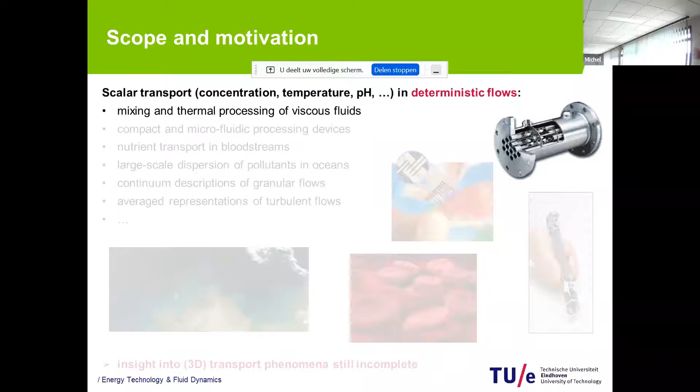And okay, what is now the scope and the motivation in general of our work? Well, that is scalar transport, and that can be anything from concentration to pH values, for example, in deterministic flows. And that actually happens in quite a lot of different flow systems. So there can be in industry, for example, mixing and thermal processing of viscous fluids, small systems outside of industry, so for example, nutrient transporters. And the list is actually much longer than that. Turbulent flows, they also can fit within this category.

We know quite a lot about transport phenomena. All the insights are still, of course, incomplete. And that is our general motivation, to deepen the insights in these types of systems.

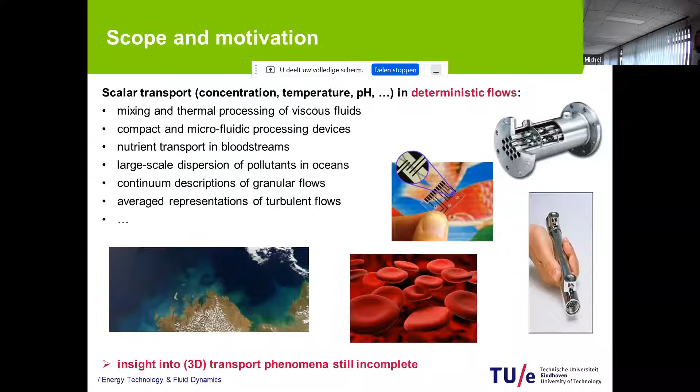Okay, a brief outline of my presentation. I will first of all discuss a number of basic concepts with respect to Lagrangian transport to make it accessible for you, because I presume that not everybody of you is an expert in this type of material. So I will introduce first of all some basic concepts, and then I will actually discuss 2 topics. So it's a very broad title, but there's only limited time. So I will actually zoom in on 2 topics that we have been working on.

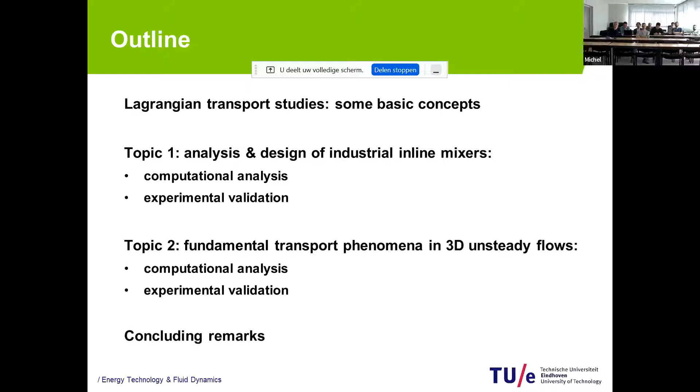The first topic is the analysis and design of industrial inline mixers. And the second topic is of a more fundamental nature, where we use those same concepts to study 3-dimensional transport phenomena in unsteady flows. And in both cases, it will consist of a computational analysis and connected with that experimental validation to ensure that all we study is also relevant in practice. And I will end then with a number of concluding remarks.

Okay, but first of all, some general concepts then. Well, transport basically involves 2 transport mechanisms. That's first of all advection, and that is the distribution of material elements throughout the flow, and also the deformation. So you start out with a circular blob, and that deforms typically into something like this, a filamental structure, that is advection, transport by the fluid flow.

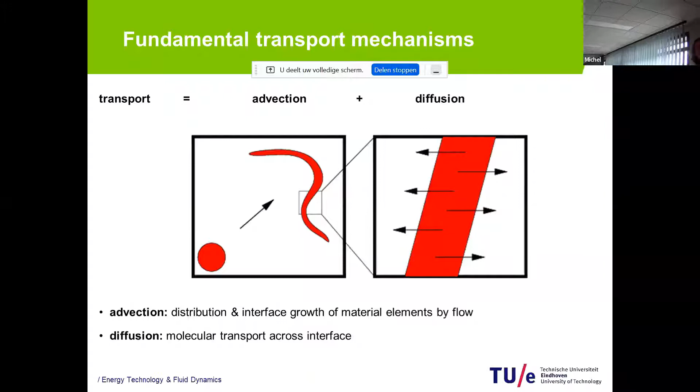And across the interface of that fluid element and the environment, we have diffusion. So in general, transport has those two contributing mechanisms. But within the scope of my talk, I will only focus on the first part of that transport, namely the advection by the fluid motion. And that is dominant in the case of very high Peclet numbers.

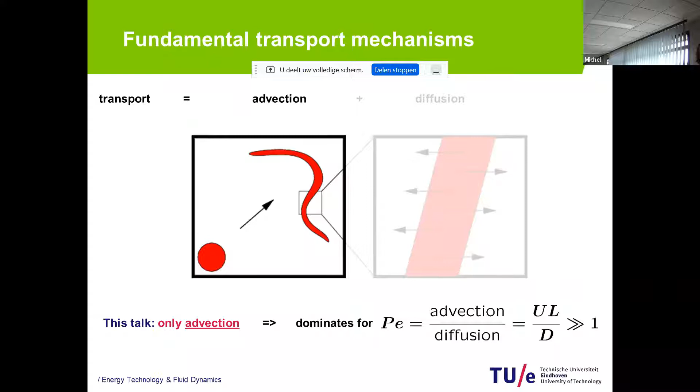So the advection over the diffusion is characterized by the Peclet number. And if that is much larger than 1, then advection dominates. And we can largely describe this transport by zooming in on just advection. That will be the scope or the restriction of my presentation, advection only. And okay, how can we now investigate that advection?

In terms of the Lagrangian fluid paths, what we have is some fluid element starting at a position x0, and that will move in the course of time along a certain path because of the flow. x is then the position of the fluid element in time, and u is the fluid flow in which that fluid parcel is moving.

This is now the flow, which is the formal solution to the kinematic equation. We now zoom in on these paths that fluid elements follow, and we do that usually in terms of the geometry and the topology of these fluid paths. What you see here is a very simple example of streamlines in the wake of a cylinder.

That reveals certain coherent structures, because these fluid paths, in this case the streamlines, usually have a particular organization due to, for example, continuity or symmetry. That is the level at which we investigate transport, at the level of this type of coherent structures that form in these fluid trajectories. We often refer to this as the so-called flow topology, the geometry or topology of the flow.

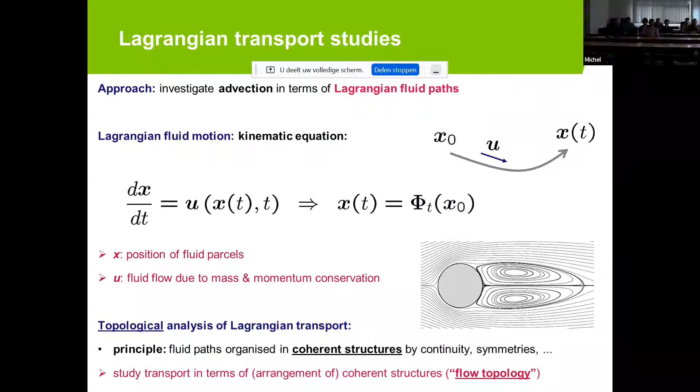That's the approach by which we investigate transport in the scope of Lagrangian transport studies. Interesting to know is that there is also a particular kind of advection, namely chaotic advection, which is very relevant for practical applications. I will briefly illustrate what that means, chaotic advection.

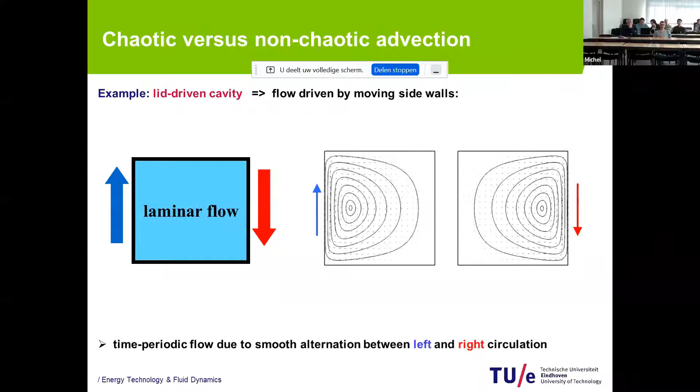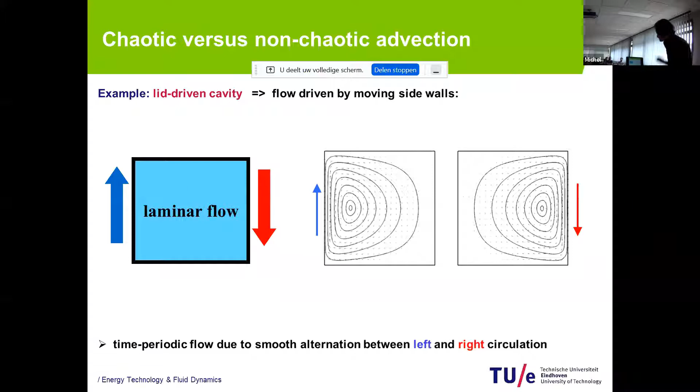That sets up a time periodic flow. This is now the toy problem in which I will briefly demonstrate the difference between chaotic versus non-chaotic advection. I do that by releasing in that flow two blobs of material, a red blob and a blue blob. Now let's see what happens as they evolve with the flow.

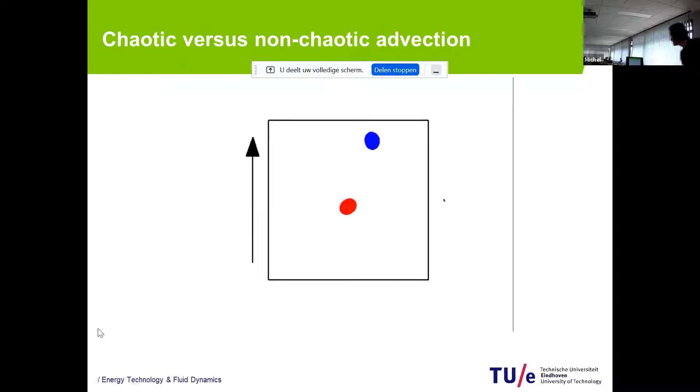I have a nice animation prepared for that. So now we see these two blobs start to evolve in the flow, and the arrows indicate the direction of travel of the sliding wall and also the velocity of that wall. The main thing is that in this flow, we see these two blobs, the blue one and the red one, gradually develop completely different behavior.

The blue blob remains relatively compact, it deforms a little bit, but not that much. It simply moves around. The red blob, on the other hand, shows completely different behavior. We see really stretching and folding, and stretching and folding, and that difference becomes more and more dramatic in the course of time. This goes on for a little while.

At some point, when you stop the simulation, you see that these two initial blobs, both circular, the red one and the blue one, have evolved into completely different patterns. The blue element only undergoes minor deformation, and that is non-chaotic advection. The red element undergoes dramatic deformation, stretching, folding, evolving into this very complicated pattern. This is chaotic advection. This is a nice visual illustration of the difference between chaotic and non-chaotic advection.

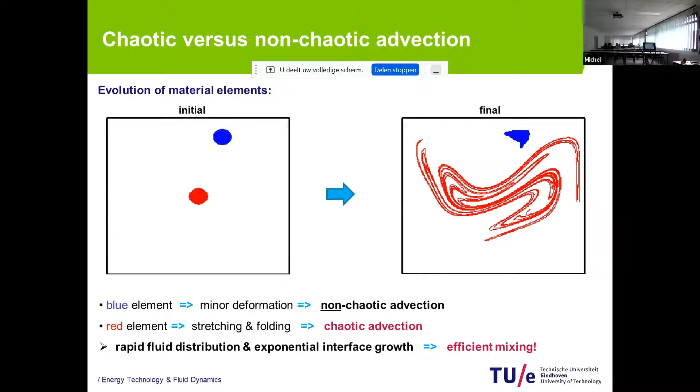For applications, it's often interesting to know how well a flow mixes. If you want to establish good mixing in a laminar flow, then this is what you want: chaotic advection. This whole concept of chaotic advection will be very useful to investigate the mixing properties of laminar flows, and that is exactly what we will do in this first topic, this more application-oriented topic, using Lagrangian transport studies for the analysis and design of industrial inline mixers.

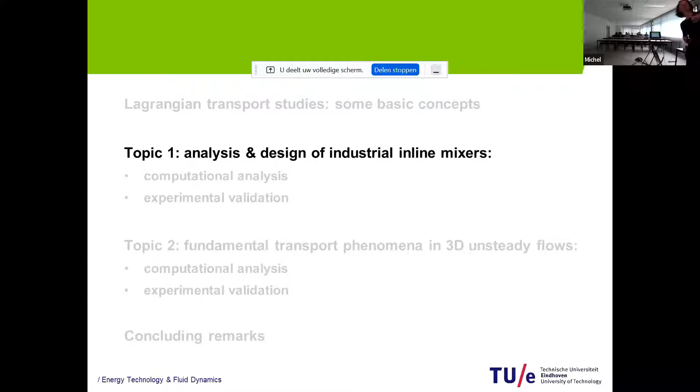That is how an inline mixer in industry works, and they are actually widely used. Standard equipment for polymer processing, for example, uses this principle, but also smaller scale devices for process intensification, so small scale heat exchangers, and even microfluidic devices use that same principle.

So it's a very common principle in the industry. And if you want to develop those systems further, to make them more efficient, more versatile, and more controllable, we need deeper insight into the mixing behavior inside these systems. Therefore, we need a scientific approach to really understand and optimize these devices from the fundamentals on.

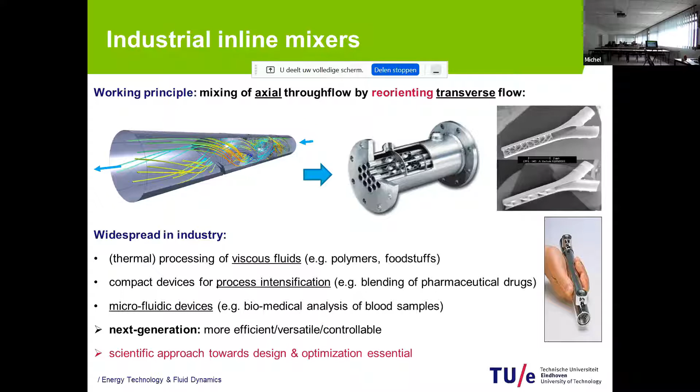So here is a type of system, namely inline mixers, where we will use these fundamental concepts from Lagrangian Transport to design and optimize these devices. And I will use a case study for that, the rotated arc mixer.

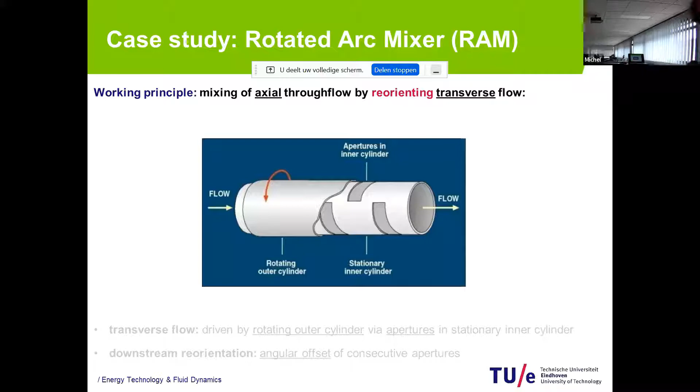The schematic of the rotated arc mixer is shown here. That is also a pipe, basically, with an axial flow driven by a pump. The inner part of that RAM, rotated arc mixer, is a stationary cylinder with windows cut out of it, and fit around that is a cylinder that rotates. So that is the construction of the rotated arc mixer.

And it effectively works as follows. Here we have that inner stationary cylinder, this is the axial flow. Here we have windows, and because of this rotating outer cylinder, I generate an internal flow in the transverse direction. So here at this first window, you see this transverse flow. This is the streamlined pattern of the local transverse flow.

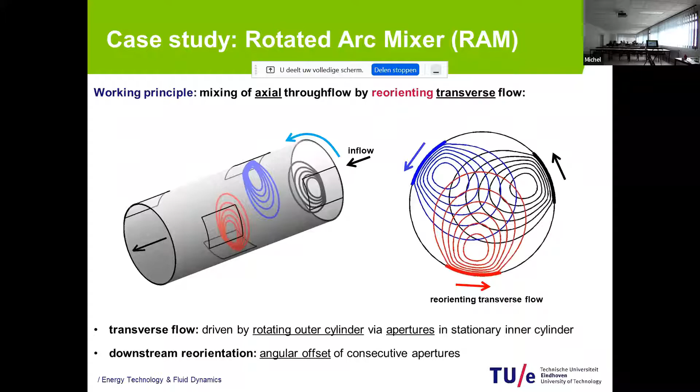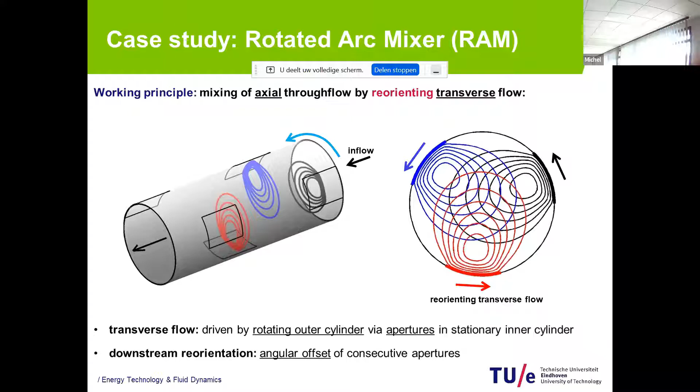And the subsequent window has an offset in the angular direction, and that results in the same flow, but then reoriented. And the same with the next window. So you have these offset windows in the downstream direction, and that effectively leads to a reorientation of the transverse flow while you are moving in the downstream direction. That is the particular way in which this inline mixing principle is implemented in this rotated arc mixer. So this is our case study, and this is an actual device that you can purchase for industrial applications.

Okay, so let's now analyze the mixing properties of the device, first of all via simulations. And the strategy is now to identify coherent structures. We saw before that Lagrangian transport studies focus on identifying coherent structures, and from that determine what the mixing properties are. Well, that is exactly what we will do here.

So what you see here is a bunch of spaghetti, basically, and all those black trajectories are streamlines inside the three-dimensional streamlined pattern inside this rotated arc mixer. At first sight, it looks like a disorganized bunch, which may suggest good mixing. But we can identify coherent structures in this streamlined pattern.

And first of all, we can identify certain, I'll just call them special stream tubes. I don't want to bother you too much with technical details, so for sake of simplicity, I just call them special stream tubes, like for instance this red one. And they tend to entrap material, because if material ends up at the inlet of such a special stream tube, it stays inside. It can never leave that.

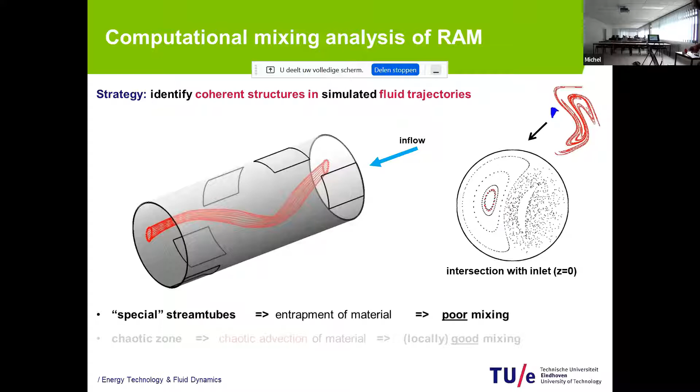And the blue one encircling the red one is another special one. And this light blue one is actually circling around that. So we can identify sets, in this case, of special stream tubes, highlighted in color here. And they all entrap material. And this is a 3D picture.

This is then the cross-section at the inlet. So here you see these stream tubes emerging as these colored islands. And they result in poor mixing because they trap material and that prevents mixing. But around that, this remaining black part is a chaotic zone.

And in that local chaotic zone, we have that chaotic advection that I have demonstrated before. So if you now connect that with this previous simple illustration, then inside the stream tubes, we see behavior like what we saw with the blue blob. Blobs remain compact, bad news for mixing. And in that black region, we see this stretching and folding, which is characteristic of chaotic advection. So locally, we have good mixing.

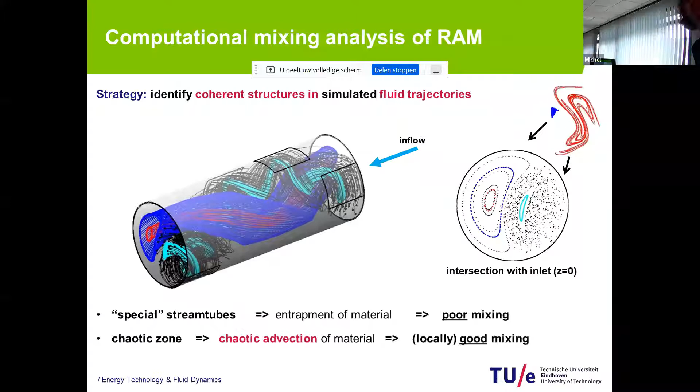So this notion of certain coherent structures existing in your system allows you to investigate whether for certain operating conditions I have poor or good mixing. Well, here we have locally poor mixing.

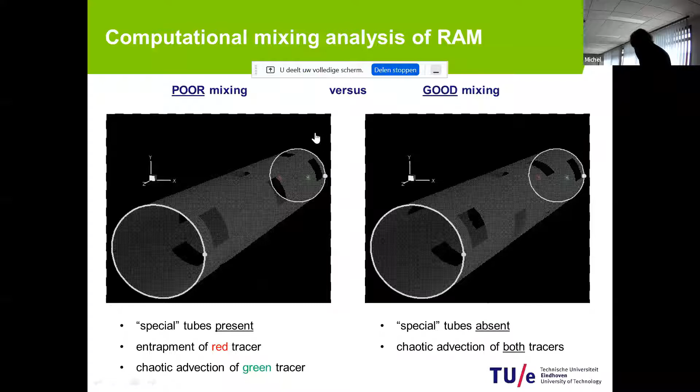And I can demonstrate that now by way of two videos again. So on the left, we see the situation with these special stream tubes. On the right, we see a situation without these special stream tubes. And we again visualize the mixing by simply releasing dye, in this case at the inlet.

I release red dye at this position, green dye at that position, and the same in that other RAM. The difference is just the operating condition and the locations of the windows. Now what you see here on the left, the red dye stays in one of these special tubes and therefore doesn't spread in the transverse direction, while the green dye does, since it's released in the chaotic region.

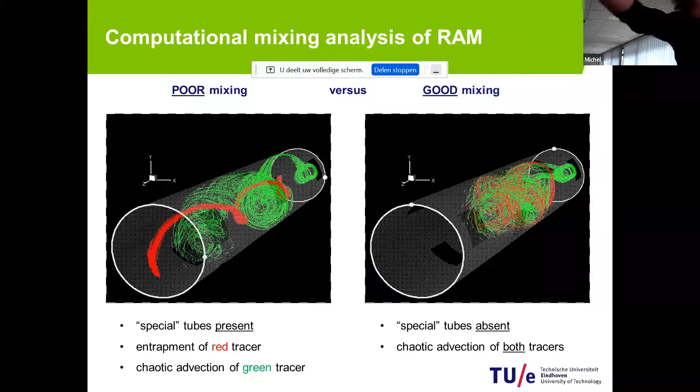Here we have no such tubes, so here both the green and red dye spread in the transverse direction. So here we have a globally good mixing situation, which is what you want in this type of device.

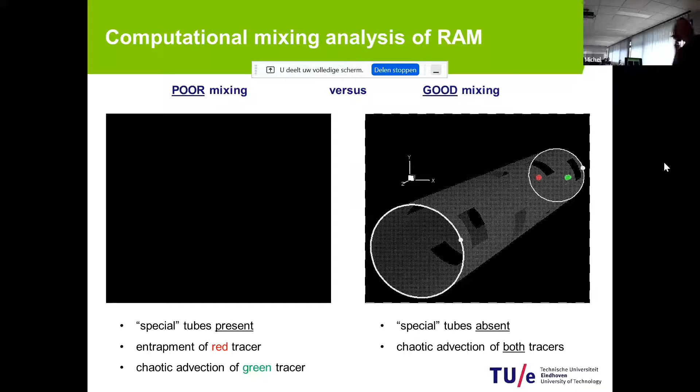And here, well, the picture has vanished, but we had a poor mixing situation, and we can use that to systematically optimize the operating regime, in this case for the RAM.

So I can just zoom in on the cross-sectional topology, because that is sufficient, since these three-dimensional stream tubes emerge as islands here. So it's sufficient to just zoom in on the cross-sections, and I can do that as a function of the system parameters.

In this case, that's the residence time, or 1 over the flow rate, and the reorientation angle between the subsequent windows. I can simply do that for this whole parameter regime, and then I get pictures like this.

So here I see large islands appearing, and each island, again, is one of these special stream tubes. So something I don't want for mixing.

But there is one region here in the lower right corner where I see no such islands anymore. So here I have global chaos. From a mixing point of view, this is where I want to be.

And this is a way to use these fundamental concepts to optimize a practical mixer in reality. So in this case, it was the rotated arc mixer, but the dynamics are the same for any inline mixer. So in any other inline mixer, I can do exactly the same.

I can do a parameter study like this and identify these situations, and then I know I have a mixer which indeed mixes well. So this is a way to use these fundamental insights for practical analyses of, in this case, mixing devices.

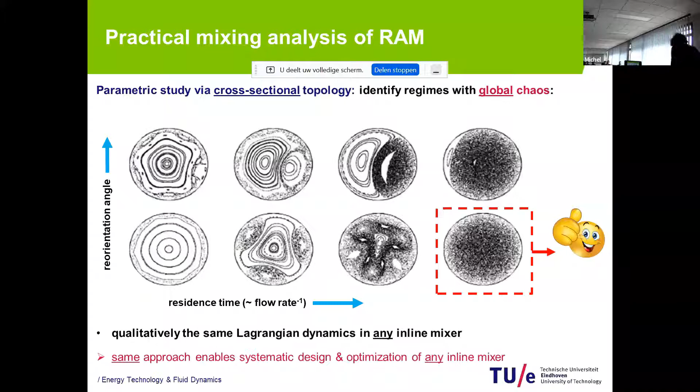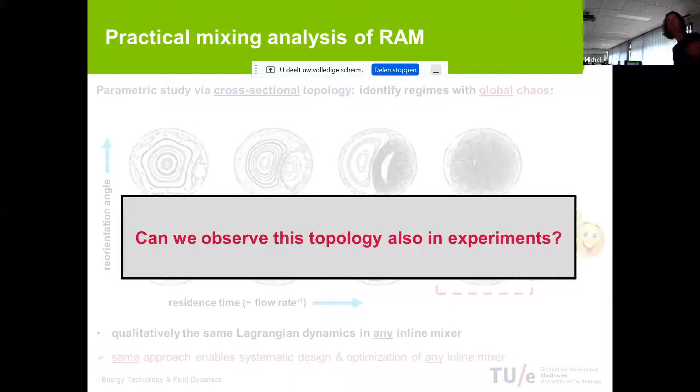Yes, this was all simulations. How relevant is this? Well, the only way to determine that is by testing it in experiments. Do we indeed see the same behavior happening there as well? And that's the second part of this first topic.

So the experimental mixing analysis. I will first briefly introduce the setup, and then I will use that setup for two experiments to actually validate those phenomena that we just saw.

You may have to speed up a bit.

So the challenge is, it's a three-dimensional system, so it's quite difficult to have optical access for experiments. So what we actually do now is we have the original three-dimensional RAM, but we represent it by a system which has the same dynamics, but which is easier to investigate in experiments.

So we represent the three-dimensional RAM by a two-dimensional time periodic RAM. And the transverse flow now becomes the flow in the disk, so it becomes a two-dimensional flow. And the actual evolution in the original three-dimensional RAM now becomes an evolution in time.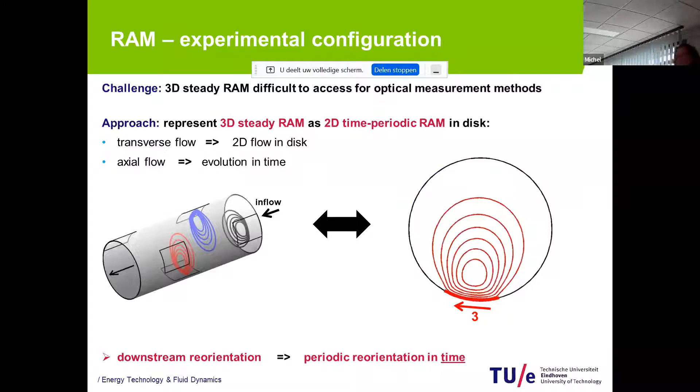From a dynamic point of view, that is the same, but it's, again, much more accessible from an experimental point of view. So the downstream reorientation now becomes a periodic reorientation in time. So this is our original system, and that now becomes this system, two-dimensional time periodic, for the experimental analysis.

Okay, so this is now the actual setup. Here you see a schematic of that system. It is now a disk, a very shallow layer of fluid, and the surface flow of that shallow flow is now our two-dimensional flow representing our rotated arc mixer.

And the walls are now driven as follows. We have apertures on the side, and here we have small conveyor belts, and they can be turned on or turned off via electrical motors, and that represents this rotating outer cylinder. So this is our setup.

And the measurement methods will be as follows. We will do particle tracking of the surface flow, or the two-dimensional flow, for the velocity field and also the Lagrangian trajectories. And we will also do dye visualizations to visualize the mixing patterns, as we will see later on.

So let's now use that, first of all, to visualize this flow topology, and I will use as a case study now a 4-step RAM. So this is our two-dimensional domain. We have 4 windows: 1, 2, 3, and 4.

And I can activate them one by one in this sequence. So each color represents the streamline pattern corresponding with all of the windows that I am activating at this moment. So we have a time periodic flow.

And a way to visualize the flow topology is by so-called stroboscopic imaging. That is actually illustrated here. So here we see a juggler, juggling with juggling balls. A way to visualize the dynamics of these juggling balls in this case is simply by illuminating them with a stroboscope, and then you get a picture like this.

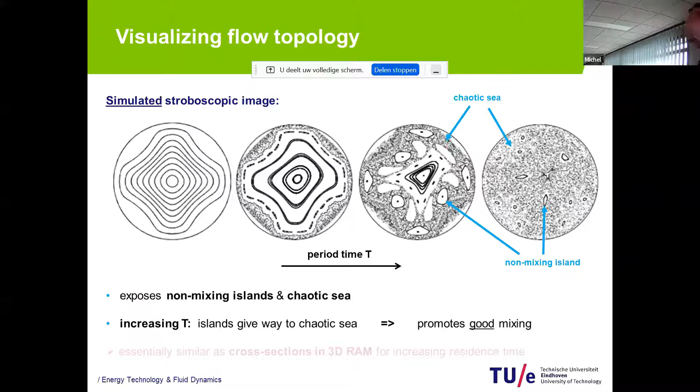And we can simulate that as a reference. So if you simulate those stroboscopic images in the RAM as a function of the period time, you will find a picture like this. For very short period times, you see one large island, and that will fall apart into regional non-mixing islands and regional chaotic seas, the larger the period time gets. So this is the predicted stroboscopic image in a 2D RAM as a function of the period time.

Can we also see that in an experiment? Well, this is what we now do with our PTV experiments, particle tracking experiments. So we sprinkle the surface flow with tracer particles, we record them with the camera, and then we can obtain the stroboscopic images from that.

So this validates that indeed these topologies consisting of islands and chaotic seas, as we have predicted in our computational analysis, they exist in reality, and they are also robust. Otherwise, you wouldn't be able to observe them in experiments.

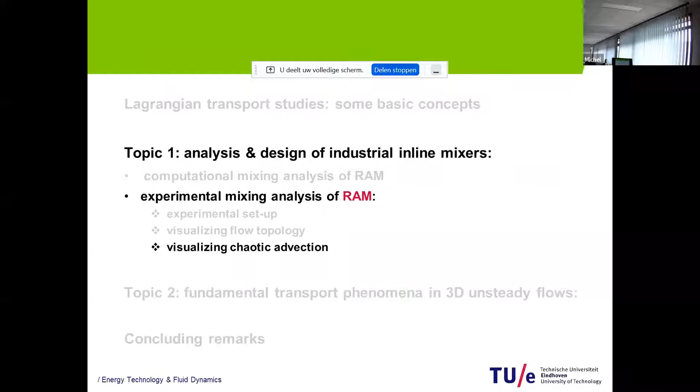Okay, so this is the first part of the mixing analysis, visualizing that flow topology. And now let's try to visualize also chaotic advection. Here I will zoom in on another case study. Before we had a 4-step RAM, now we have 2 windows, but the principle is still the same.

But for this analysis, it was more useful to use a 2-step RAM. So we only switch between 2 flows, but that's the only difference. And here we already zoom in on the situation where we have global chaos. So this is the stroboscopic image for that 2-step RAM.

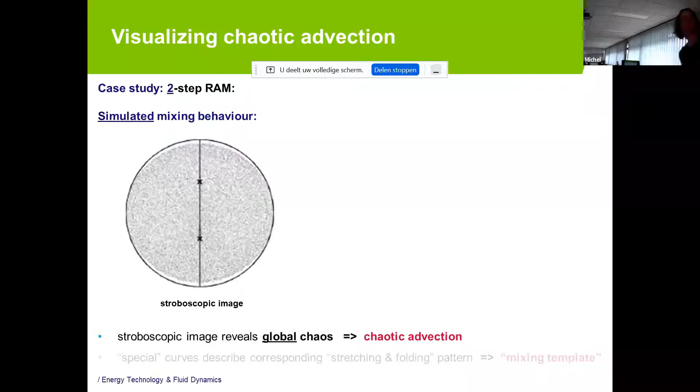And we see one large chaotic cloud. So we have global chaos. So we expect here global chaotic advection based on this. And you can identify, and this is also a technicality that I will not go into detail, but you can identify in such a global chaotic region what I call special curves, here indicated by these red and blue curves.

And they actually describe the stretching and folding pattern. So you may remember from my earlier illustration that chaotic advection is characterized by stretching and folding. And you can actually predict what particular pattern that will be by these so-called special curves. They're also known as manifolds, by the way, but that is the stretching and folding pattern that you expect. That is also often referred to as the mixing template.

And let's see whether we see that. So we now simply simulate the behavior of a concentration field, which has an initially circular position like this. So this is simply a circular patch of dye. And let's now simulate how that will evolve in the course of time.

With the 2 walls, now this wall is activated, now this one, and you see gradually this wall again. You see now gradually a certain pattern emerging during that evolution of that concentration field. And this is then the concentration field after a certain amount of time.

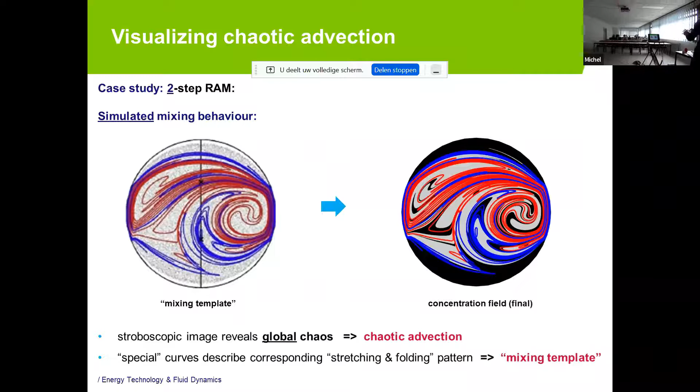And if you overlay that with the special curves, you see that it matches very closely. So indeed, these special curves define the particular pattern in which this chaotic advection happens. So this is all simulated.

And yeah, the same question as before, is this also happening in reality? So we take our same 2-dimensional setup, and now we don't release tracer particles in that flow. Now we also create an initially circular blob of dye. So this is simply a glycerine, I think, with some dye stuff. So this is now our initial field in the experiment. And let's now see what happens here.

First, this wall is activated. Now the one on the left. And now we switch back, and this goes back and forth.

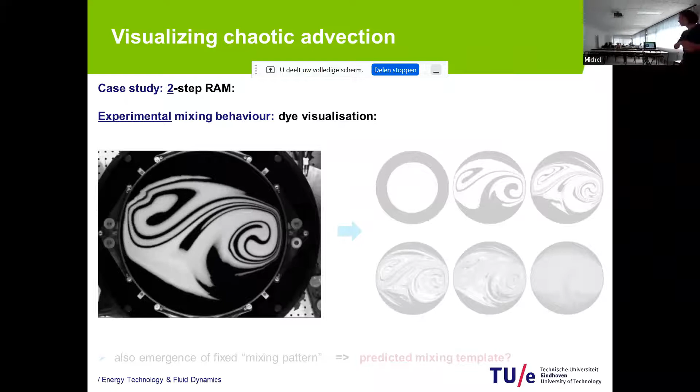Here you already qualitatively see a similar pattern emerging as what we saw before in the simulations. This is the sequence of snapshots corresponding with that. So this is the initial circular pattern, and that becomes more and more complicated in the course of time. This is the evolution of time.

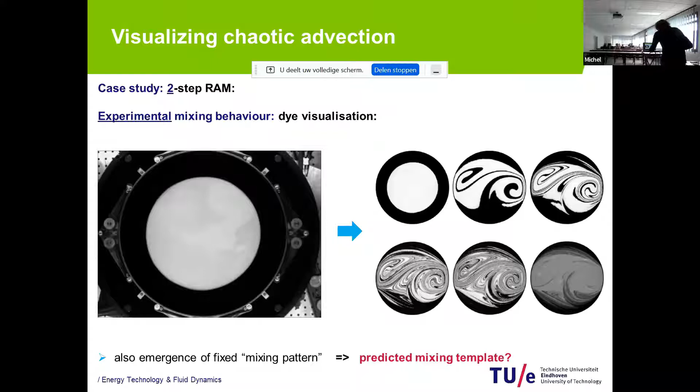And this is what we measure now in the experiment. Is this indeed corresponding with that mixing template that we predicted based on these special curves? Well, this is the experimental evolution, the top row. This is the simulated evolution, the bottom row. And visually they correspond very well.

Indeed, if you now show that original mixing template, so this pattern defined by these special curves, we see this correlates very closely with what we simulate, and that again correlates very closely with these special curves. And this is now an indirect visualization and thereby also a validation of that mixing template.

We cannot directly measure these special curves, as opposed to the flow topology, which we could measure directly. Here we cannot measure these curves directly, but based on the pattern that the concentration field evolves during the course of time, we can infer that this must have been the underlying mixing template. So this is an indirect visualization of that mixing template.

So overall, we see that indeed our Lagrangian transport phenomena, and in particular the formation of these coherent structures and that emergence of chaotic advection according to certain patterns, is indeed experimentally validated and thereby a useful concept for practical analysis.

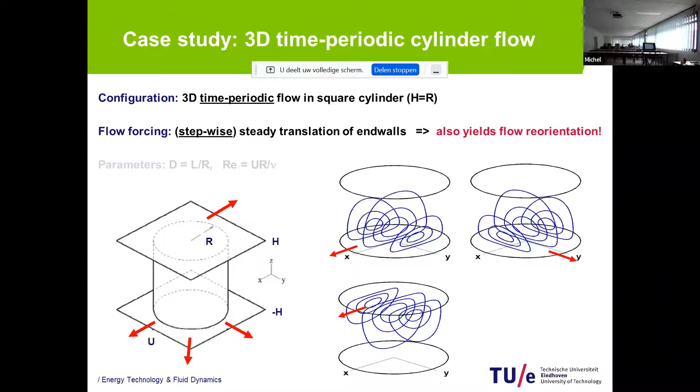So this actually is also a sort of flow reorientation. By activating different walls, I get the same flow, but simply a translation of that flow. Some parameters: D is the dimensionless displacement of the wall, L is the displacement of the wall during one step, R is the radius, and Reynolds number is another important parameter.

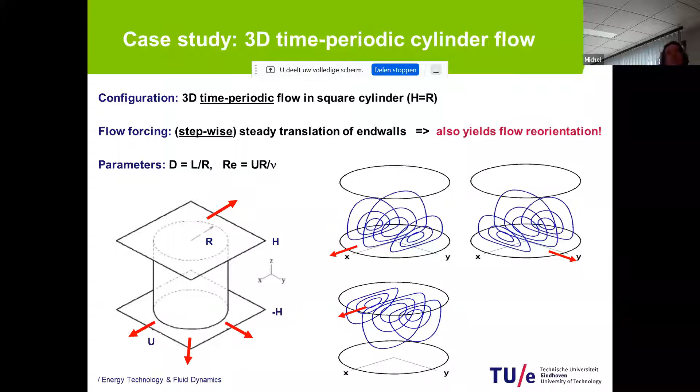Again, what I will do is set up periodic flows with that, but we will see in a minute what I mean by that. This is the basic flow domain that we consider, just a three-dimensional cylinder flow driven by the end walls.

Let's now have a computational analysis of some phenomena that we observe. We did a lot of work on that, but I will only show some results. The first one is that you can actually expose basic dynamical states, as we refer to them.

For example, if you only activate the bottom wall, first a translation in the x direction and a second translation in the y direction, and repeat that in a periodic fashion, what you will see is that tracer motion, the stroboscopic images, will be restricted to invariant spheroids. It may not be obvious, but this is actually a spheroid, a two-dimensional flow within a surface. And there is an infinite family of these surfaces, not just one, infinitely many. So you can have larger and smaller of these spheroids that are concentrically arranged.

You will find that the motion is always restricted to one of these invariant spheroids. So essentially, although I have a 3D flow, essentially I have two-dimensional dynamics.

What's more complicated is if you translate the bottom wall in the x direction and the top wall in the minus x direction, you get a situation like this, what I refer to as quasi-two-dimensional. It's 3D flow in the sense that it's not restricted to a surface anymore, but it is restricted to a very thin layer, which gives it a quasi-two-dimensional nature.

The last situation to illustrate is to include three steps: first translate in the x direction by the bottom wall, then in the minus x direction by the top wall, then in the plus y direction by the bottom wall again, and repeat. Then I get a situation where tracers occupy the entire three-dimensional volume. This is a truly three-dimensional situation.

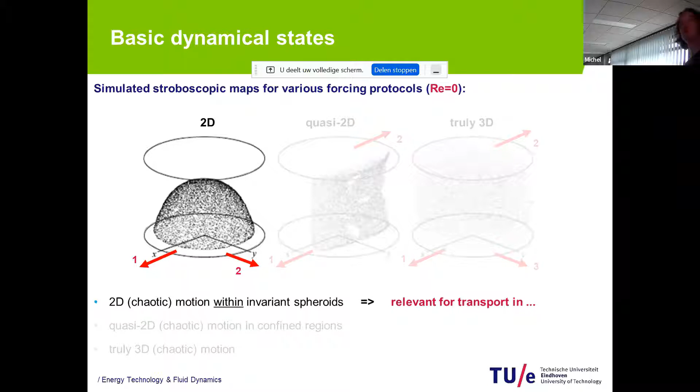What I will zoom in on for the remainder of this presentation is this particular first case where motion is restricted to invariant spheroids. It's the simplest case in this three-dimensional flow with respect to dynamics, but it's nonetheless quite relevant for transport in, for example, geophysical flows.

In geophysical flows, because the atmosphere has a very small thickness compared to the radius, we have essentially quasi-two-dimensional motion. So in atmospheric and geophysical flows, we have motion restricted to spheroids, actually to actual spheres. That is, from a dynamical point of view, exactly the same as what we see in our cylinder flow for that particular forcing condition.

So we see oceanographic flow where transport takes place primarily in one layer, and the same can happen in the atmosphere. That is a practical, or realistic, situation in geophysical flows where this restriction to two-dimensional spheroids is quite important.

In general, we don't have exact restriction to such layers, because in the atmosphere and oceans there's usually some density gradient in the radial direction due to temperature or salinity variations. That usually leads to a situation like this—in the case of temperature differences, this may be denser air.

Denser, heavier air will sink underneath lighter, warmer air, and you get these kinds of circulations. So such radial density gradients will generally lead to local convection currents. What we have is, in general, two-dimensional motion restricted to spheres, but subject to perturbation in the radial direction by the emergence of convection cells.

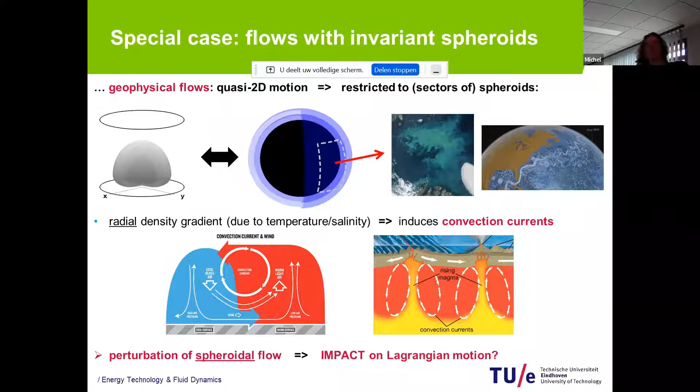And also here, first computationally, and then some experimental validation of the phenomena that we observe.

What we have is, let's say, a baseline—a situation where I have no perturbation, meaning the tracer motion, the Lagrangian motion, is restricted exactly to a spheroid. From there, we'll see the effect of perturbation on that baseline. In our cylinder flow, we have that situation in the Stokes limit, where I only have forcing by translation of the bottom wall. No matter what sequence of forcings I take, if I only involve the bottom wall, I will always have these invariant spheroids to which the dynamics is restricted.

So I have essentially two-dimensional dynamics inside spheroids, but since it's a continuous family of spheroids, the dynamics in each is not the same. It turns out that if I move from smaller to larger spheroids, the dynamics tend to evolve from less chaotic, with larger islands present, to more chaotic, with smaller islands present, to no islands at all.

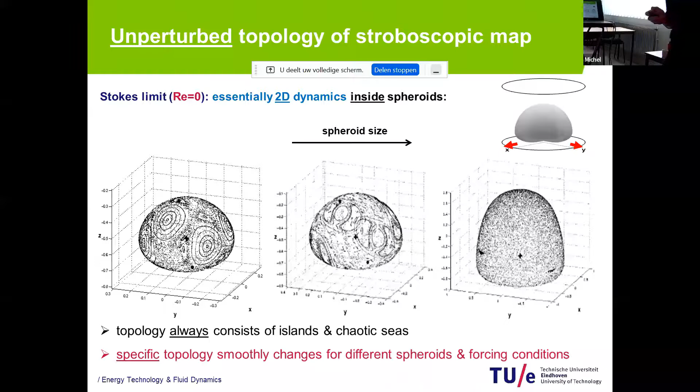But I will always have these two building blocks—no matter what spheroid size I'm considering, I will always have a topology with islands and chaotic seas in some arrangement, changing with spheroid size. This is our baseline. Also the situation in geophysical flows in the most simplified case—what will now happen if I perturb this?

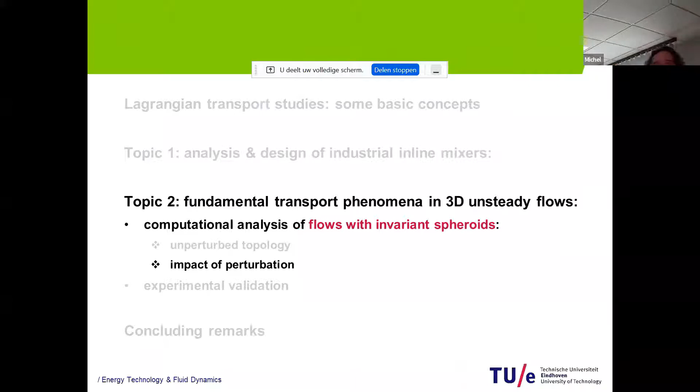In geophysical flows, perturbation by the emergence of convection cells. Here, what happens with some other form of perturbation, and we will see that this will actually be irrelevant. But let's simply see what happens if I perturb that situation. The way we perturb here is by fluid inertia. Remember this baseline with the invariant spheroids was the Stokes limit, Reynolds is 0.

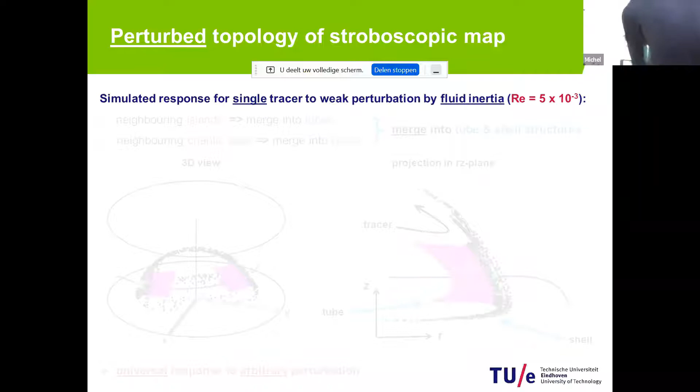What we will now do is introduce a very weak amount of fluid inertia in the flow. Notice the Reynolds number, 5 times 10 to the minus 3 - a tiny non-zero Reynolds number, but it will have a dramatic effect. Because what we saw in the two-dimensional situation, in the Stokes limit, was motion restricted to spheroids, consisting locally of islands and chaotic seas. And they now respond to that inertia.

Islands of neighboring spheroids now tend to merge into tubes. That is what happens with the islands. Chaotic seas on neighboring spheroids tend to form thin chaotic shells, and they do not coexist next to each other - they interact as well. So we see formation of tubes, we see formation of shells from the islands and the chaotic seas, and they connect and merge into tube and shell structures, and that's what you see here.

So I have a very minor perturbation, 5 times 10 to the minus 3, by the Reynolds number in this case, and now I see very new structures emerging, given here. And this is actually one structure.

Visualized by one tracer - this is a stroboscopic image of one tracer. I start here, and then I see this tracer evolving around the tube, indicated in magenta, and then at some point it reaches the end of the tube, and then it starts moving in this chaotic shell, and then at some point it reaches the other side. So these are completely new, very complicated structures that emerge from the very weak perturbation of that initial situation.

And something like this may apparently also happen in oceanographic flows, for example, because the dynamics are the same. Important to note is that we now perturb by fluid inertia, but I can perturb any way I want - that will give the same result.

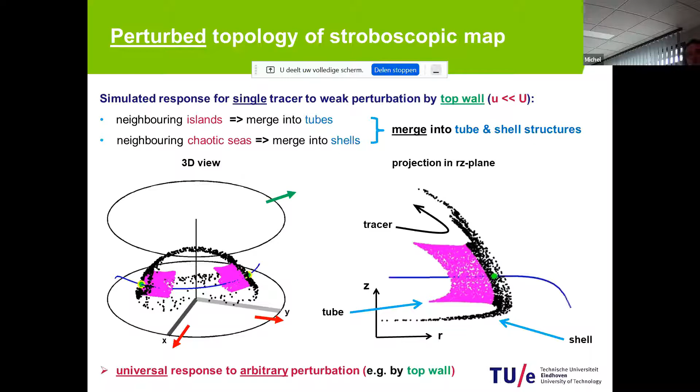So fluid inertia or top wall perturbation gives us the same response of the system to that perturbation. And it is actually much more universal than that. This is just a particular situation where I illustrate that. But if I look at that cylinder flow and use completely different forcings - in the previous example we had a sequence of forcings consisting of 2 steps, one along the x-axis, one along the y-axis - but I can also have different combinations of bottom wall translations, so different forcing conditions.

I nonetheless get, in a qualitative sense, the same response. I see islands merging into tubes, I see chaotic seas merging into shells, and I see those two emerging into these complicated structures consisting of tubes and shells. So that is still within the cylinder flow, but even in a completely different flow.

So here we have an external flow which is driven by a sphere - a solid sphere which can rotate about various axes. And there we have the same. The Stokes limit also has dynamics restricted to invariant spheres. A tiny perturbation, and I see the same phenomenon: shells emerging from chaotic seas, connected by tubes emerging from islands. So it's a very universal phenomenon, this particular response to perturbation.

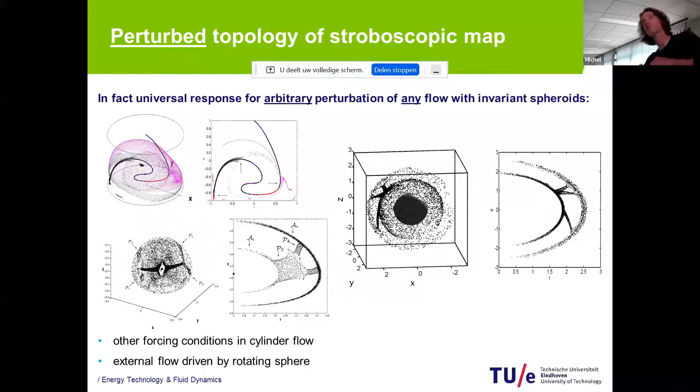And again, because of this universality, it is very likely that we can see something similar in oceanographic flows, for example. We haven't examined that yet, but that's actually our next step. We expect to see that happening there. So a completely different flow than an oceanographic flow, still apparently capturing phenomena relevant for those flows.

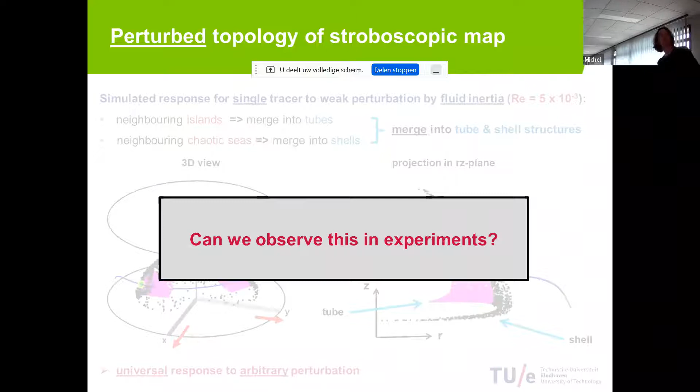Okay, time-wise I'm still more or less okay. Those were all simulations, and yeah, also a bit complicated, but I still wanted to share that with you. The main question here for the moment is also, can we observe this in experiments? Is this a real robust phenomenon that we observe here? Well, therefore we do experiments.

And in the interest of time, I will very quickly go over the setup. So it will essentially again be measurements of the 3D stroboscopic map by particle tracking, but now the 3-dimensional version of that. So we don't record tracer particles with one camera.

We now record tracer particles with, in this case, 4 cameras, and that allows us to determine the 3-dimensional motion. But the basic idea is the same, it's only more difficult and challenging to achieve in a technical sense. It is essentially PTV, but the 3D counterpart of that. So let's quickly go over that.

One important thing in the simulations is that we have to impose a perturbation. So we have chosen different perturbations, such as fluid inertia, top wall motion, etc. We actively have to perturb the flow. Here we don't do that. Here we simply say, well, it's a realistic system, it's never perfect, so we always have some natural experimental imperfections present. If the system is indeed very sensitive to very small perturbations, then these imperfections should already be a natural perturbation, so we don't actively perturb this. We just rely on experimental imperfections. This is a situation where they actually come in very handy.

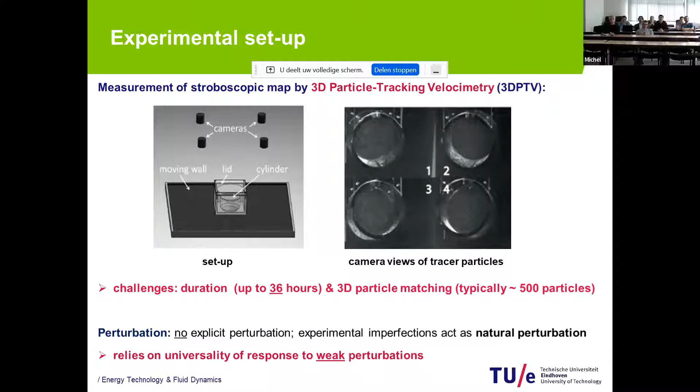So let's see what happens. Well, here you see the result. We have done these 3-dimensional PTV measurements without explicit perturbation, just in our cylinder flow. And this is what we observe. It is actually more challenging and involved than what it may suggest here, but I'd simply go to the final result. It turns out that indeed we are able to measure that same behavior.

So here we see the experimental stroboscopic image, as measured with 3D PTV. And also here we have these two parts highlighted. The magenta part is the tube formation part, the black part is the shell formation part, and indeed you see again a nice transition from motion along these tubes into these chaotic shells, exactly as we predict in the numerical simulations.

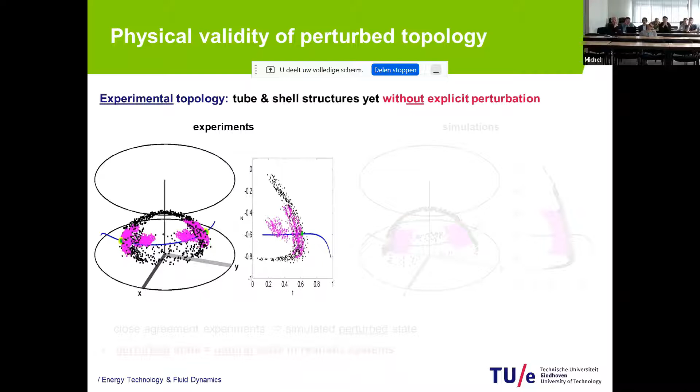And those are, for your reference, the simulations. You see indeed it's not exactly one-to-one correspondence, but it's a very delicate phenomenon, so we were already happy to see agreement at this level. I think it's safe to say that we have a close agreement between what we see in experiments and what we have simulated with actively imposed perturbations. So this might very well capture relevant phenomena for oceanographic flows, but again, we haven't yet investigated that.

It carries a very interesting message, namely, since we have not imposed any perturbation here, since we simply rely on natural imperfections, apparently this perturbed state is the natural state in reality, because no system is perfect. So this is what you will see in reality, based on these results.

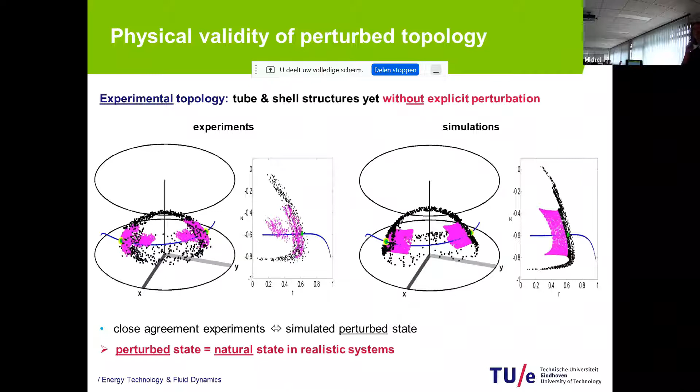Okay, so that's the end. Let's finish with some concluding remarks, and those are general, very general remarks. So what we saw is that the Lagrangian approach is actually quite essential for in-depth studies of transport.

You saw that this is useful and basically also necessary to properly investigate industrial mixers. We saw that this allowed us to systematically analyze fundamental transport phenomena with potential relevance for geophysical flows. And it's very important to highlight here that we can only do this with this Lagrangian approach. You really have to zoom in on the actual motion of the material, of the fluid elements, of material regions, because using just the Eulerian flow field or instantaneous streamline patterns will not allow you to really investigate that at full depth.

So this Lagrangian approach for this particular kind of problem, namely transport, is really essential to obtain these insights. And what we saw is that the experimental studies were able to demonstrate the physical validity of the phenomena that I've shown. This is also something that should be part of any study, to make sure that you indeed see these phenomena in reality. That allowed us to demonstrate that these coherent structures that we use for the optimization of mixers indeed exist, and that they are thereby robust. They also allowed us to demonstrate that we can have a very unexpected and delicate response to perturbation. And again, in order to make these results practically relevant and meaningful, you have to do experiments.

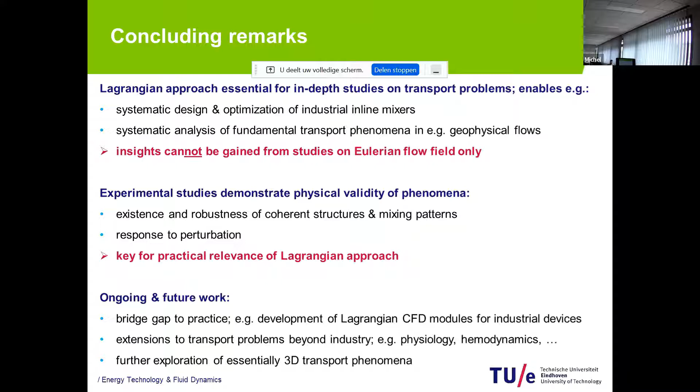So it's actually not a singular limit. Mathematically speaking, probably we don't get any singularity. It's simply a symmetry breaking, which does not involve any singular limit.

No, if I understand your question correctly, I wouldn't consider it as such. The topology itself doesn't really change. Other than that, there's a very weak drifting superimposed. It's not that it completely changes.

Yes, I have a question about your perturbation. If I understand here, it's like... you mean in the experiments? Yeah, yeah.

There are many imperfections. The experimental setup is not a perfect cylinder, because very weak perturbations already trigger this phenomenon. So we have several candidates. We didn't really investigate what the actual experimental imperfections were, but you always have them. The cylinder is not perfectly circular. The translating bottom, for example, is not perfectly aligned with it because there's a very tiny gap, since otherwise you induce vibrations. So we have to leave a very small gap between the translating wall and the cylinder, which is never perfectly aligned. The tracer particles are not perfectly passive either.

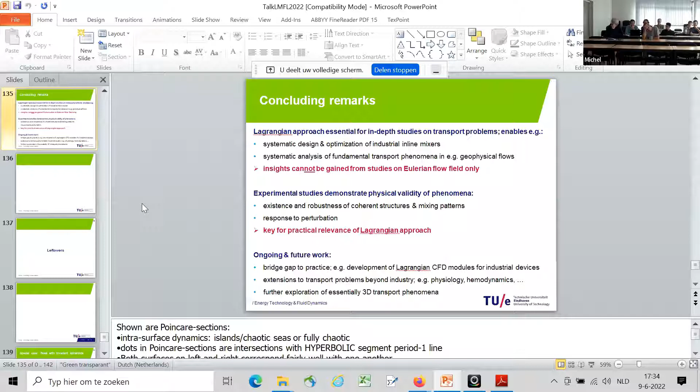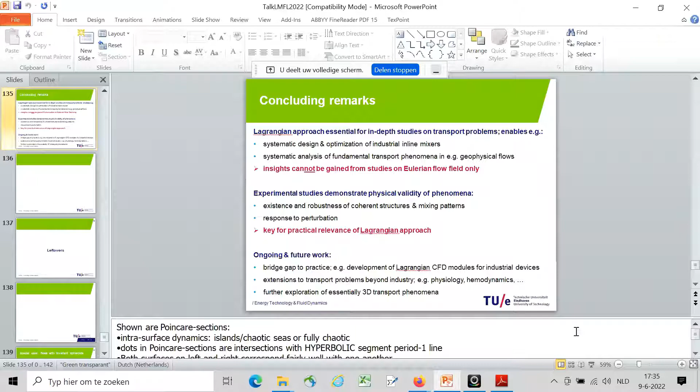Henrik, can you activate your mic? Yeah, I have my mic, but my connection is very bad, therefore I tried to post the question in the chat. I assume that in real inline mixers, the axial velocity is highest near the axis, and a fluid element near the axis would then see a larger frequency of the azimuthal motion, but this cannot somehow be modeled in the two-dimensional model experiment. Is that true, or am I wrong? By the way, I enjoyed the talk, and you have very nice experiments, congratulations.

Well, thank you for that. And you are right. If you look at the two-dimensional version of the RAM, that would correspond to a plug flow in a real 3D situation. So in the 3D RAM we have a Poiseuille profile, and in the 2D RAM you have a uniform evolution in time, which in a 3D situation would correspond to a plug flow.

So that is a difference, but it doesn't really change the dynamics in a qualitative sense. You cannot one-to-one translate the results from the 2D RAM back to the 3D RAM, only in a qualitative sense. Our primary challenge was to see whether we can indeed see these same stroboscopic maps, the islands and the chaotic seas. That was our main objective in that experimental study, and I think we validated that. But for a closer quantitative comparison, you would have to resort to an actual 3D experiment, so it's clearly not one-to-one.